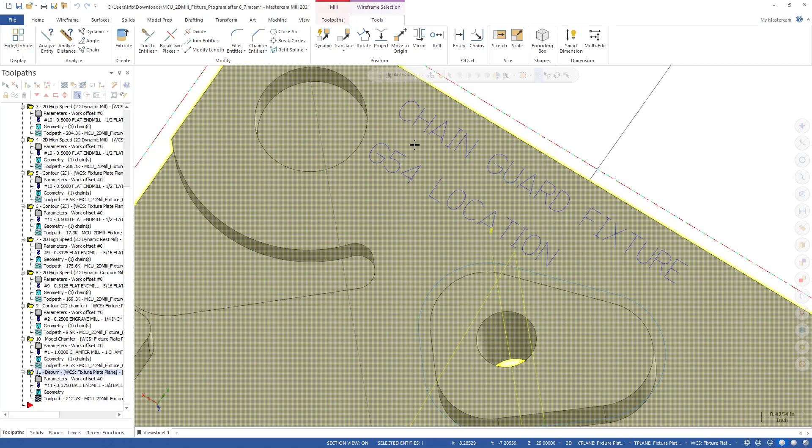So I'm going to go to my contour toolpath and I'm going to set my mode to wireframe, and I'm also going to set my chaining mode to 3D. And the reason is because I'm not really sure exactly how this text was created. However, by setting it to 3D, if there's any variations in the text here, I should be fine.

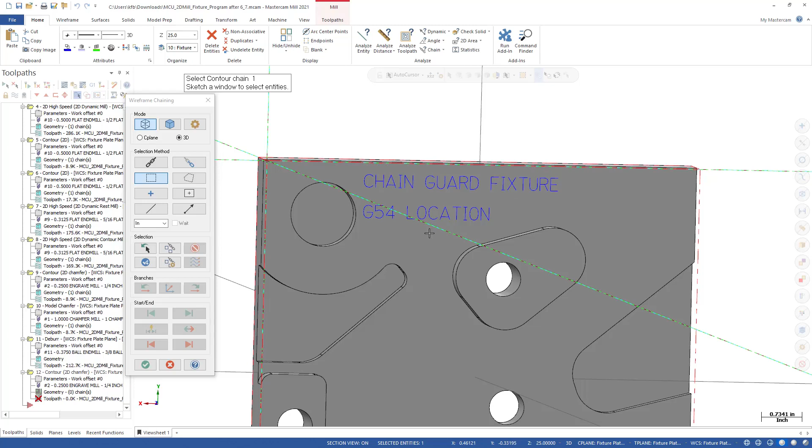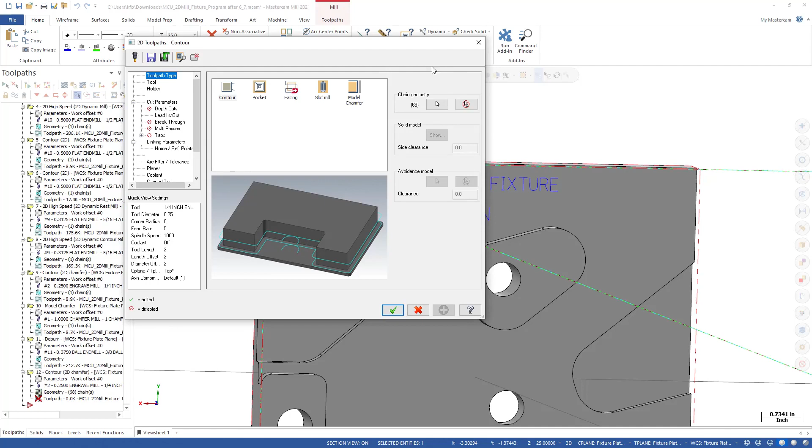So I'm going to window select the geometry, and then my start point will be right about here. And it is expected that we have a bunch of green and red arrows because we have a lot of open chains. And that's fine. We'll click OK and go right into our contour toolpath. So we see here we have 68 chains. Under the tool, I'm going to choose the engraving tool here. And we'll call this text engrave.

Under the parameters, I'm going to change this back from 2D chamfer to 2D. And for my compensation type here, I'm going to turn this off because I don't want to go down one side of the letters. I want to go right down the middle of the letters. You'll also notice that we have a stock to leave on floors here. I could put in a negative value here, but I'm actually going to do that under the linking parameters when we get there.

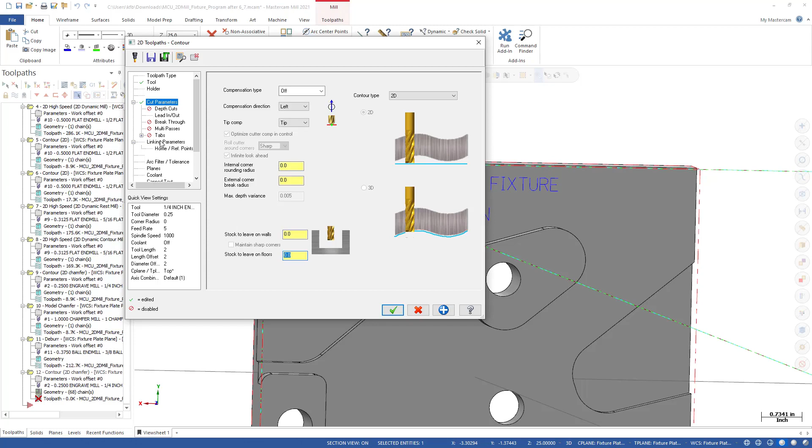I'm not going to worry about depth cuts, but lead in, lead out, I will turn off because I don't want to arc in and arc off of my lines. I want to just cut the lines, and after I'm done cutting the lines, I want to retract. So no breakthrough and no multi-passes or tabs. Under linking parameters, I will go incremental, and I'm going to go minus 20 thousandths. And let's accept the defaults for everything else and see what we get.

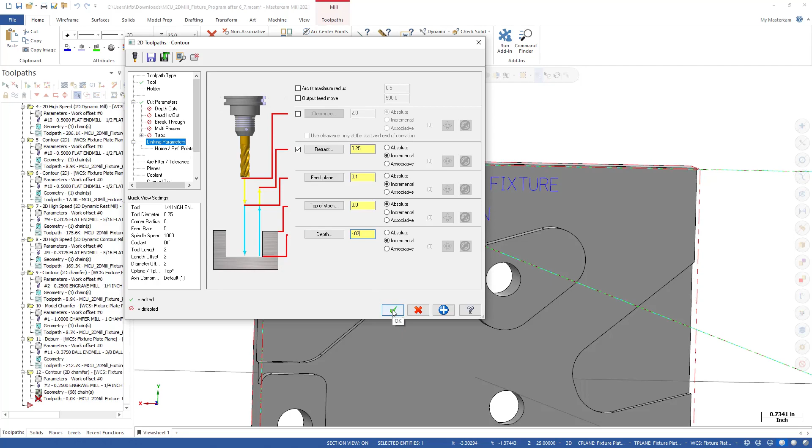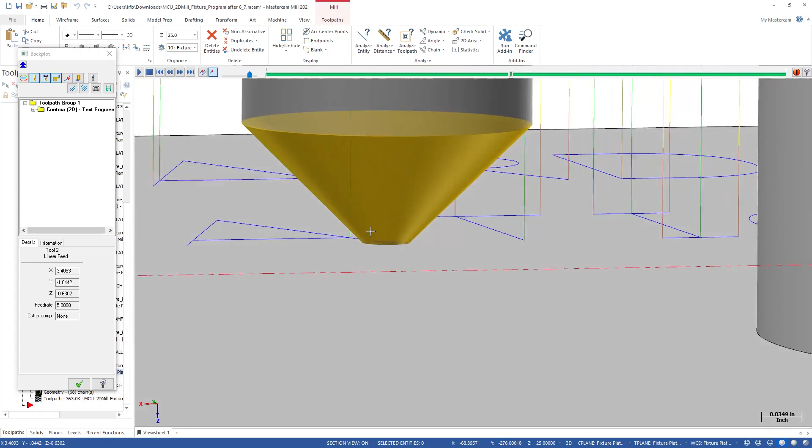So as you can see, our toolpath looks good, but we do have a lot of extra retract motion. And this may take a long time to machine. And we can take a look here. The cutter is going in 20 thousandths, but all this motion is excessive. So let's go back into the parameters and adjust this.

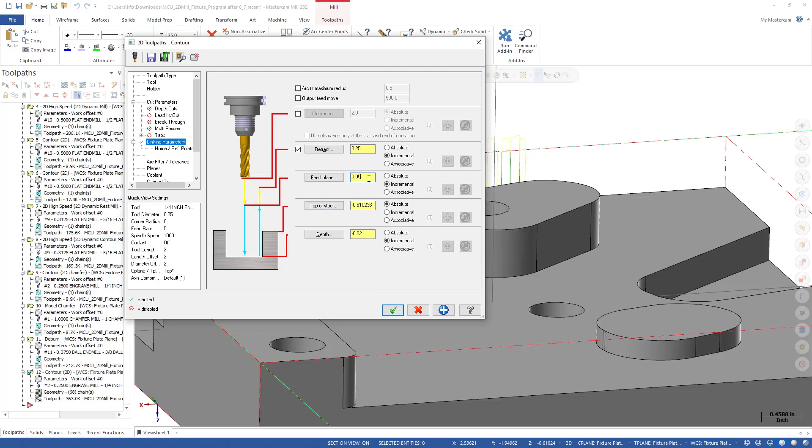Let's change the top of stock to be set to this point right here, which of course is the top of our faced area. And so as you can see, top of stock is now minus 0.6 absolute. And for the feed plane, let's adjust this from 100 thousandths to 50 thousandths. Now let's click OK and regenerate the toolpath. You can see that our toolpath motion here is much more reasonable and efficient.